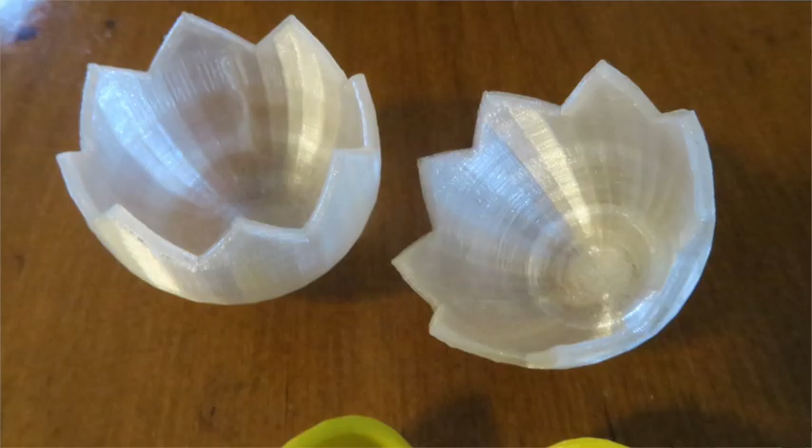Okay, so in this series of tutorials we will use Tinkercad to make a toy consisting of several layered eggs with a puzzle in the center. And the outermost egg will be a shell that can be opened along a sort of zigzaggy cut.

So we're going to start by bringing in an egg shape. We'll find it here under characters. So let's bring the egg in here and switch to top view, and we're also going to use orthographic view. The first thing we're going to do with this egg is we will resize it. Now if I resize the egg and I hold the shift key at the same time, then it's going to keep the aspect ratio of the egg, so it's going to stay round.

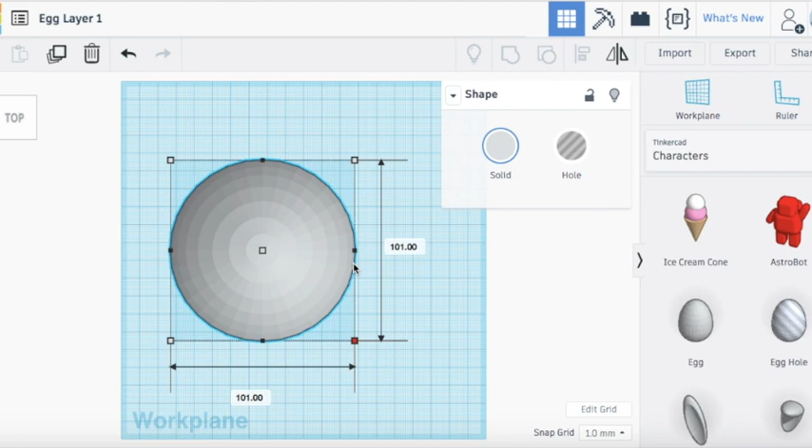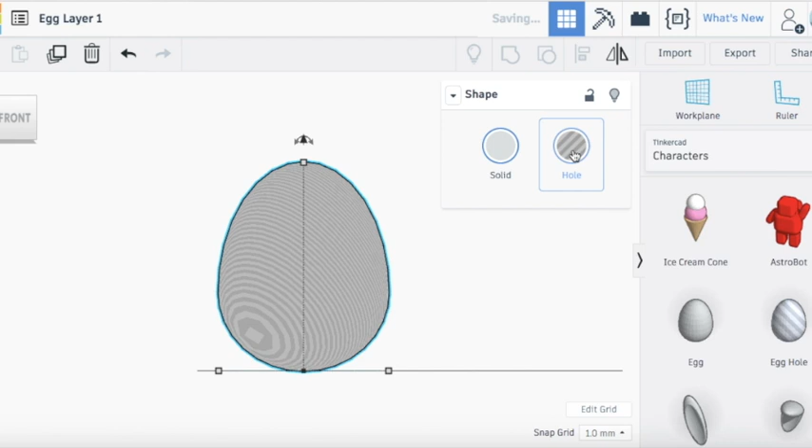We're going to resize this to 80 by 80 millimeters. Now let's also adjust the height of the egg. Right now we have 106.9. Let's make that around 100 millimeters for the height of the egg. So this egg is solid. If I were to cut it open, you would see that it's solid inside. I will change the material temporarily to hole so that we can see inside the egg.

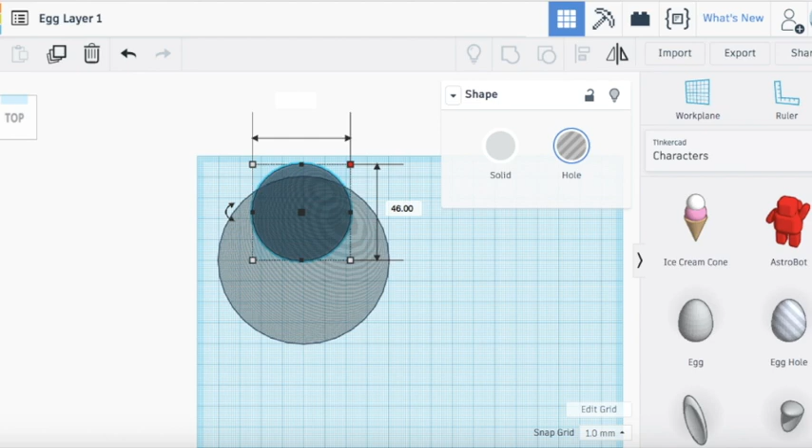Now I'll bring a second egg to make a hole in the center. So in the end we will subtract the hole from the egg and I will just be left with the shell. So let's make the width of the shell 4 millimeters on each side. The width of the outer egg is 80 millimeters and we have to subtract 4 and then another 4 because it's 4 millimeters on one side and 4 on the other. So we will end up with 72 millimeters for the width and the depth of the hole inside the egg.

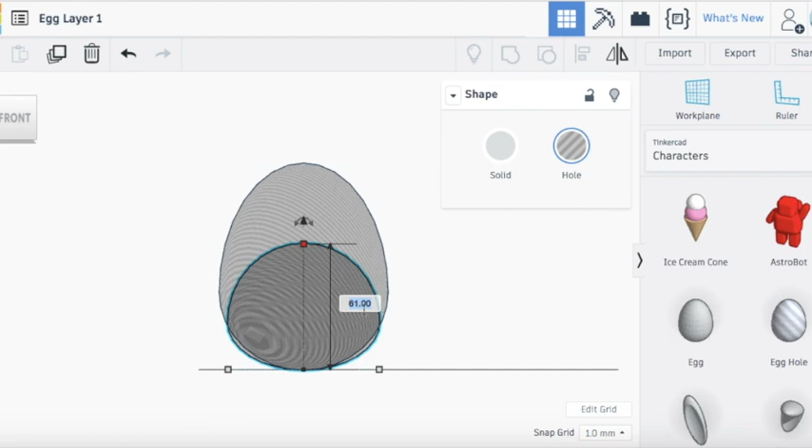Let's also center these. I'm going to center it here on this point, which is at the intersection of these axes. And for the height, let's switch to front view. We're going to make the height also 8 millimeters less. So 8 millimeters less than 100 millimeters will be 92 millimeters. And then I'll bring it up 4 millimeters. So it will be exactly centered in every dimension inside the other egg. So now I have a 4 millimeter shell all around the egg here.

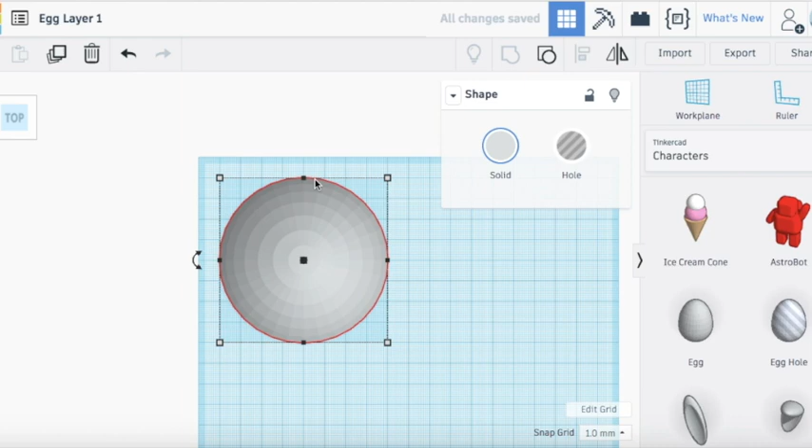So now we select the outer egg, change it back from hole to solid, and then I'll select both. By selecting a rectangle, I can select more than one shape. So I've selected the egg and the hole, two shapes it shows here, and now I'm going to group them, and now we actually have the shell of an egg. We can't see inside this egg now, but I will temporarily switch it to hole so that we can see that it's actually just a hollow shell.

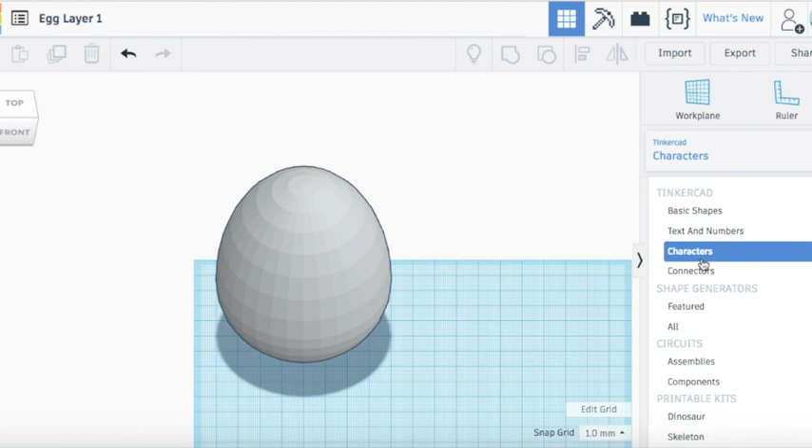So the next thing we will do here is we'll have to cut out a zigzaggy shape so that there'll be a top and a bottom half of this egg. In order to cut out the shape, we will make a stencil. I will demonstrate how we can use a stencil to cut out the shape any way that we want and also to make the top and the bottom fit together. So we'll start with a cube. And I think I'll also align this cube with the coordinate axes here. So I'll make sure that it's exactly at one of these intersections of the big axes.

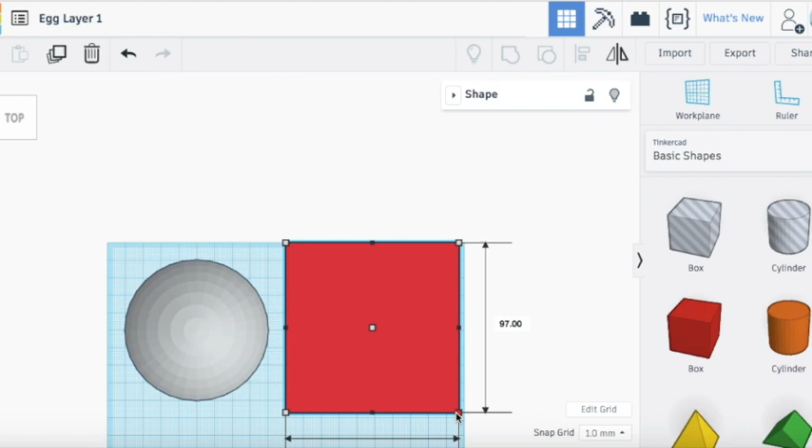Now I will make this cube a little bit bigger than the egg itself. Again, when I resize the cube from one corner, I can press the shift key, and this ensures that the cube will retain its shape so that all the sides will be scaling in the same way. And I will just scale this cube to 100 by 100 by 100. So this is the cube. Now in front view, I'm going to bring it down. My egg is 100 millimeters high, so I'll bring this down 60 millimeters. That will more or less put the cut roughly in this area.

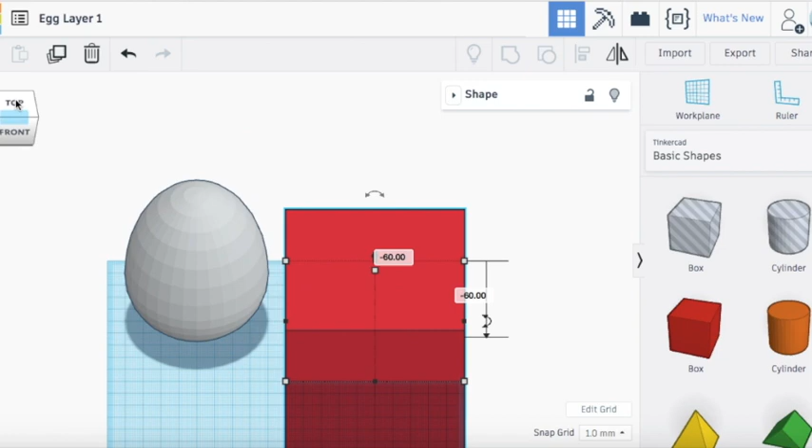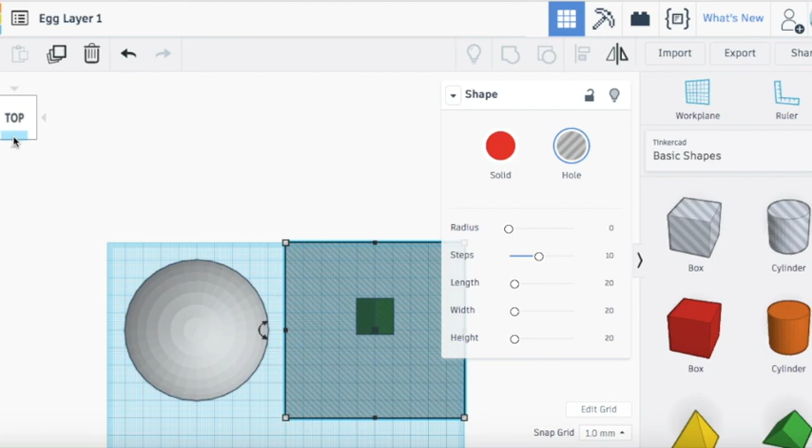Okay, so now we'll bring in a little triangle shape here, and I'll temporarily switch my cube to transparent so we can actually see what's behind it. Now this little triangle, the first thing I'm going to do to it is I'll bring it to the top. Now when you have a shape inside another shape, it can be a bit difficult to select because when I click on the triangle, I always end up selecting the cube. So one way around that is to select them both. So I can click and drag to select them both, the triangle and the cube.

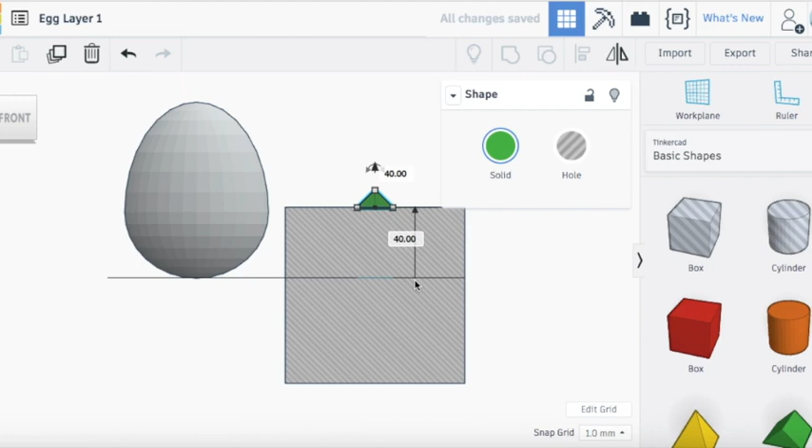And then I can shift select the cube, which will actually unselect the cube. So that's a way of selecting the inner shape here. And I'll just bring the triangle up to where it's exactly stuck to the top of this cube here. So that's a height of 40 millimeters right now from my work plane to where the top of the cube is. So let's zoom in to make sure it's exact. I don't want any gap between the triangle and the cube.

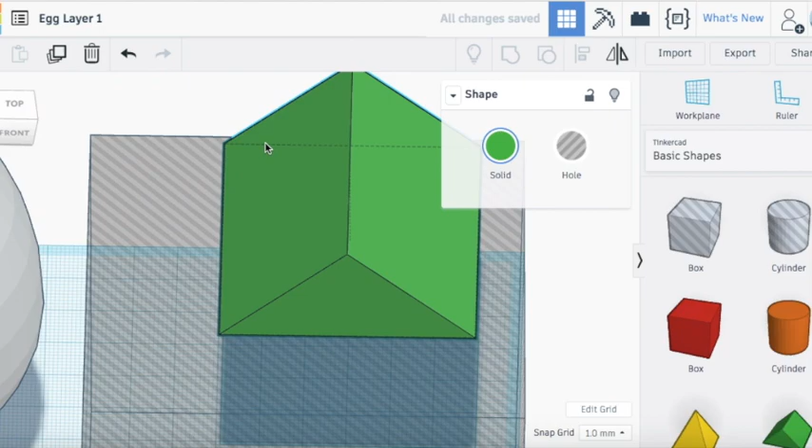And now we're going to take this little triangle and we will make it much bigger. So again, I'm going to hold shift, and from 20 by 20, we're going to rescale it to 60 by 60. And because I held the shift key while I was rescaling it, the triangle actually kept its original shape. So it also got higher in addition to getting wider.

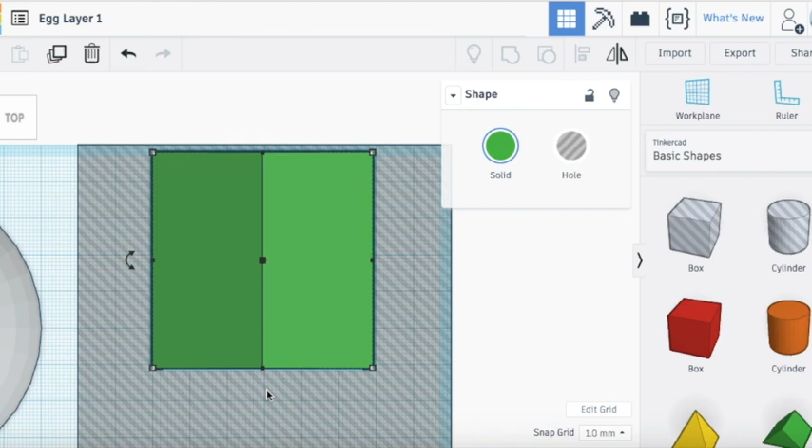So now the next thing I have to do is center the triangle with respect to the cube. So fortunately my cube is lined up on these large grid lines here, and it's exactly 100 millimeters wide. So I'm going to center the triangle so that the center of the triangle piece lines up with this line here in the center of the cube. I always want the width to be in even numbers so that the center will also be on one of these grid lines here. Okay, and I'll bring the cube up a little bit.

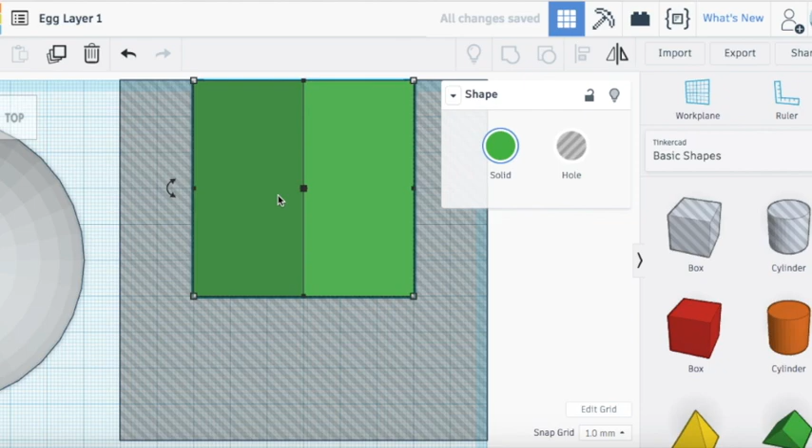And here's another trick. When you click and you drag an element around, when you press Shift, it's going to restrict it to either a vertical drag or a horizontal. So if you press the Shift key while you drag an element around, it's a good way to adjust only one coordinate, and it can't go sideways when you don't want it to. So now this triangle is in the position that I want it. So this is what I have right now, a triangle attached to the top of a cube.

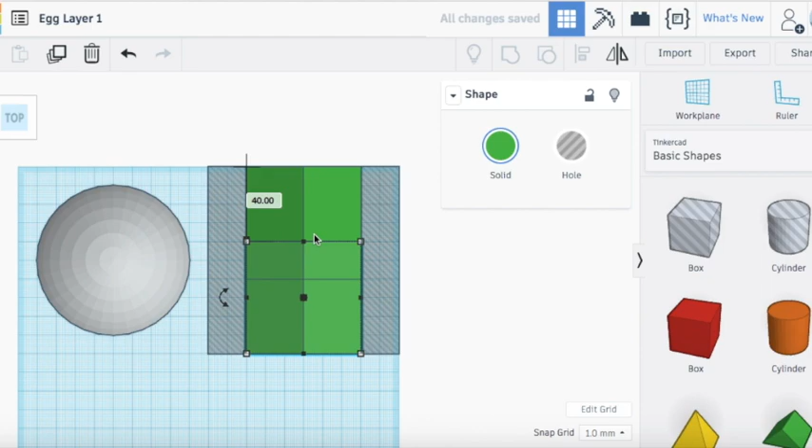Now I'll select this triangle and I'll duplicate it, and then I'll press Shift again, and I'll move the duplicate straight down by 40 millimeters. So I have two triangles attached to my cube now. Okay, so it looks like the roof on a house. Now I'll select both triangles, this one and this one.

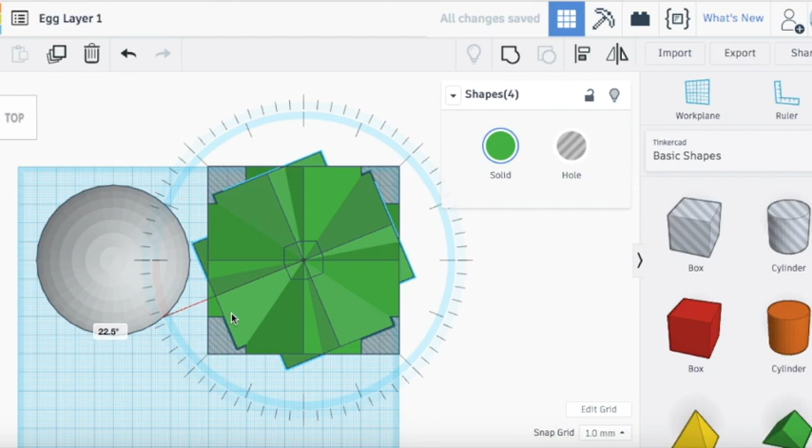I duplicate again, and I rotate the duplicated triangles by 90 degrees. Then I'll select all four of these triangle pieces, and I duplicate, and then I'll rotate by 45 degrees. So that's a very quick way of getting 8 triangles arranged on top of the cube here in a star-shaped pattern, and it's all very symmetric because I was careful to center all the triangles before I rotated them.

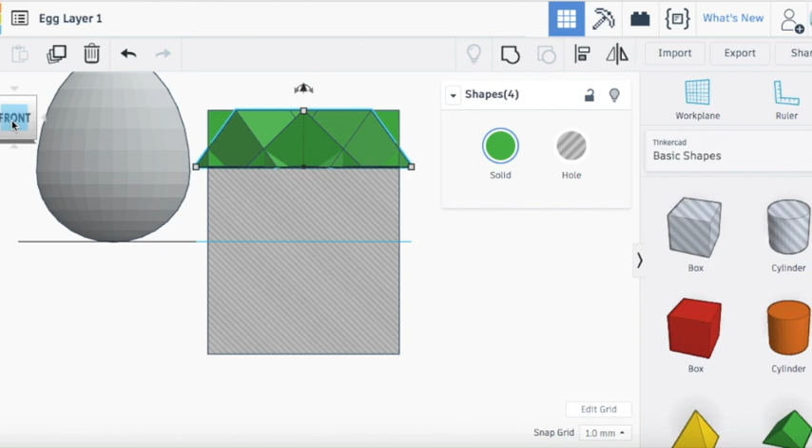We will use this later to cut a zigzag pattern into the eggshell, and I don't want that to be completely regular. I want it to be so when I turn the top piece of the egg, there should be only one position where it will fit. So for that reason, I will take each of these triangle pieces and move it up or down. Well, actually not up. I'm going to move them down by random amounts.

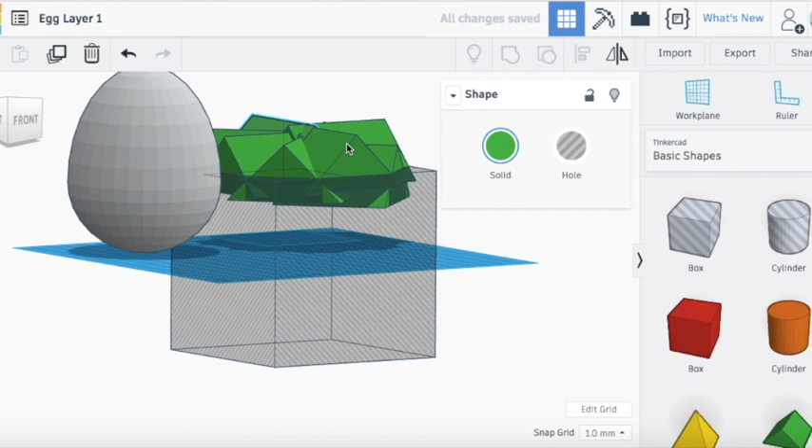I'll not pay too much attention to how far I have to move them. I'll just move them by a random amount. I'll take the diagonal ones and make them a little bit further down than the rest of them. Let's see how this looks. So they're not terribly different, but some of them are just slightly more up or down than the others.

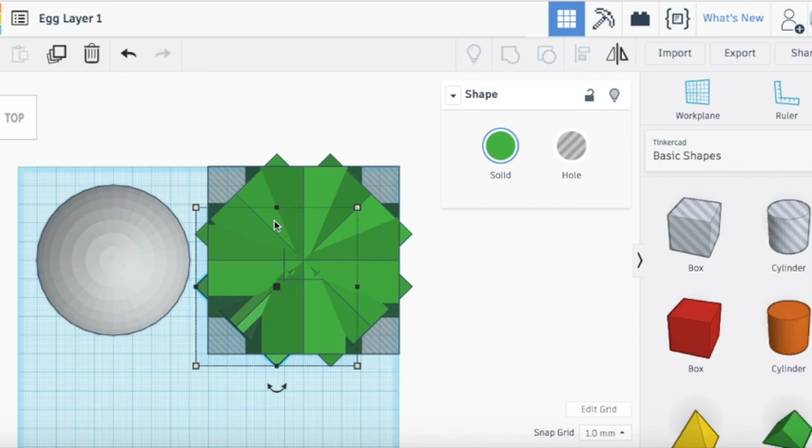And I'm going to switch to top view because the egg layer will go here. So I have to make sure there are no flat parts in between these triangle pieces. For example, if I brought this triangle piece down too much, then you would see in the top view that there's actually a part of the top of the cube that is exposed here. So that would not work later when I want to intersect my egg with the stencil. So let me bring this up so that I don't have that. So now it looks green, green, green everywhere where the egg is going to go.

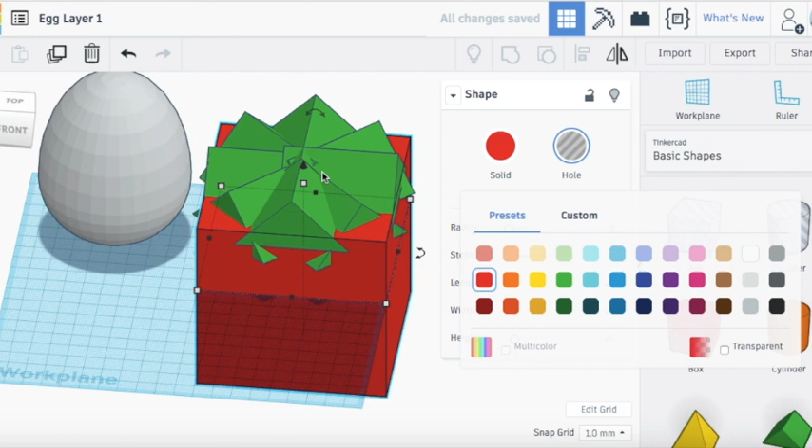So this assembly here, consisting of the cube, which I will make solid again, and these triangles attached to the top, that is going to be part of my stencil. Now before I do anything with that, let me just make a copy of the cube because I will need this copy later. And for now, I'll just move it out of the way. I'm just going to use 100 millimeters here for the distance.

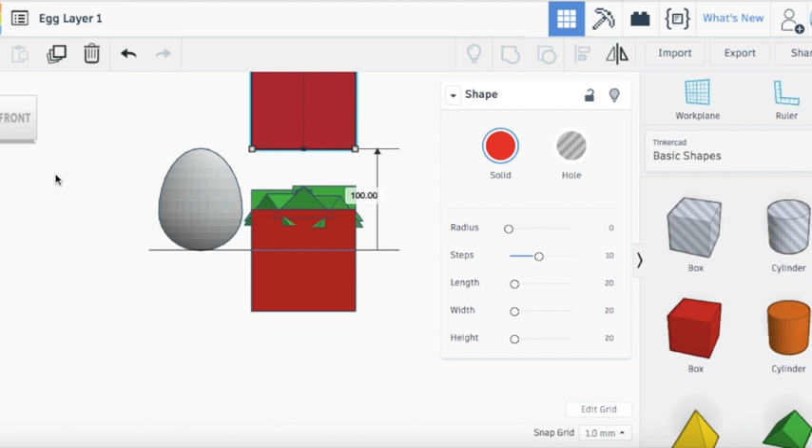And that will make it easier when I need to bring it back down later to bring it into a precise location. Now I'll select all of these bottom pieces. That's the bottom part of my stencil, and I group them. Okay, so now I have a single piece which has a sort of triangle-shaped roof. It doesn't really matter if some of the triangle parts are sticking out on the sides of this cube here. That is just fine.

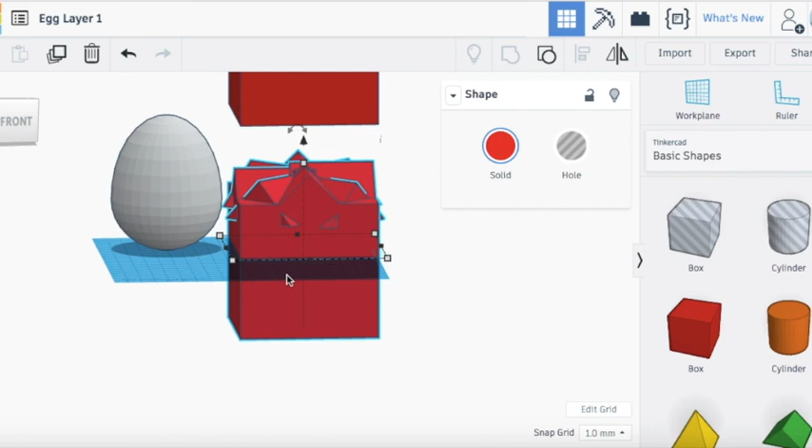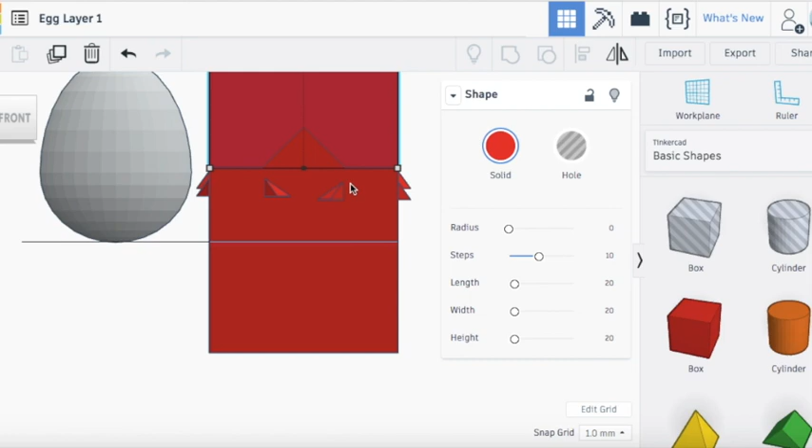The next thing I will do is I'll bring the other part of the cube that we stashed away here back down. And I'll bring it back down to exactly where the top of this cube was. So that should actually be 40 millimeters above the work plane. So now the bottom of this red cube fits exactly the top of this red cube. They're both exactly 40 millimeters from the work plane.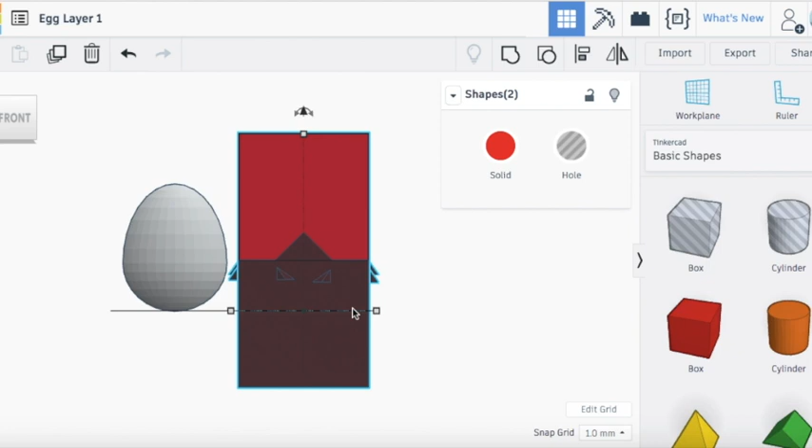So now I'll select the bottom piece. This is the actual stencil for the bottom part of the egg. I will duplicate this, and then I'll take the duplicated piece and turn it into a hole. Then I'll shift click the top cube, which is still cube shaped. So now I've selected the top cube and the hole for the bottom. If I merge these two pieces, now I have a top piece which is exactly the complement of the bottom piece here.

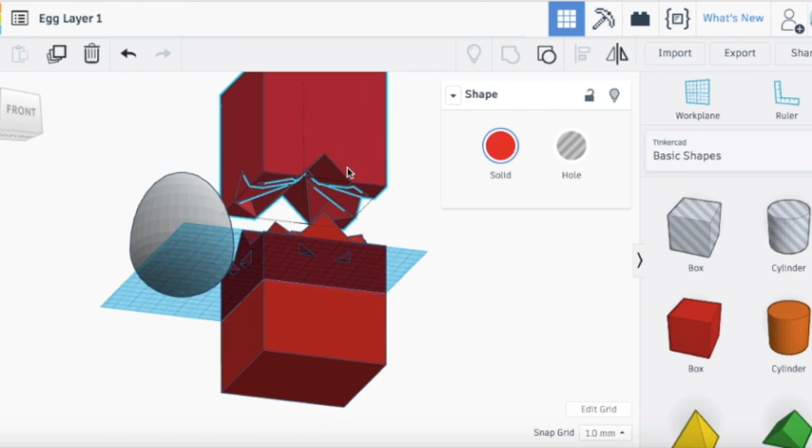So if I temporarily move this up and we go into the three-dimensional view, we can see that the bottom of the top stencil now has some material cut away from it. So it's exactly the opposite of the bottom stencil. So I'll go ahead and press Command Z to move the pieces back together so that they fit snugly.

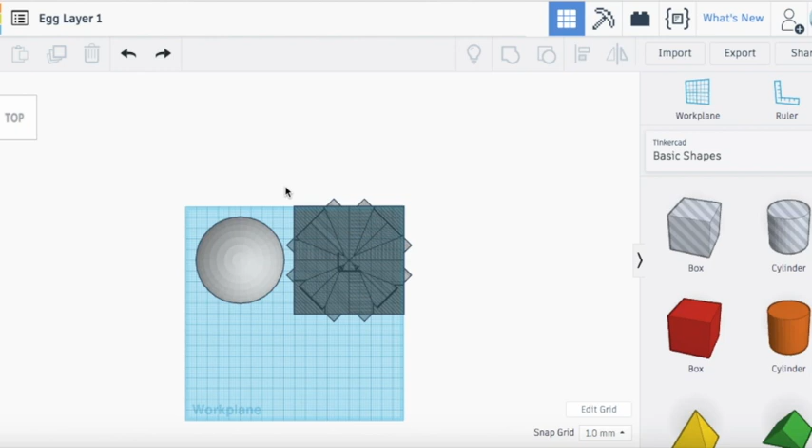So now I will take both of these stencils and I'll turn them both into holes. So we're going to use these to cut the top and bottom pieces from this egg here. So let me switch back to top view. I'll select both of these stencil pieces, and first of all I'm going to duplicate them because I usually like to keep my stencils for later reference.

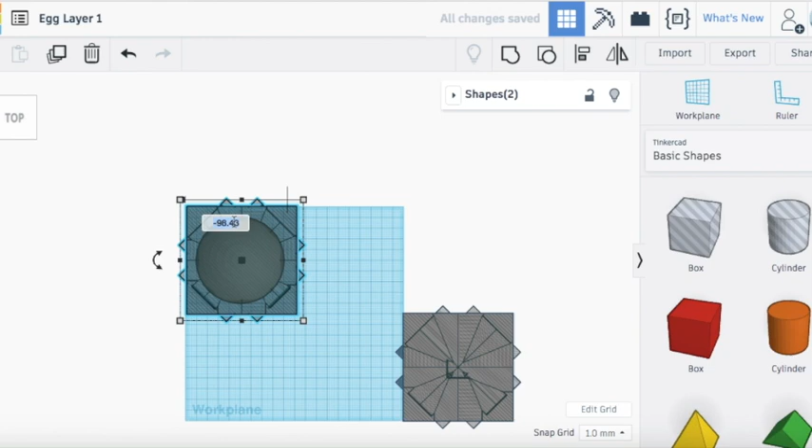I'll just move them out of the way somewhere, and I like to keep track of their location, so I'll move them exactly 100 millimeters over and 100 millimeters down from where they were. And now I'll select both of these pieces and I'll move them over the egg. So they should go exactly 100 millimeters to the left, not 98.43 or anything like that. This way I ensure that my egg and my stencil are exactly centered with respect to each other.

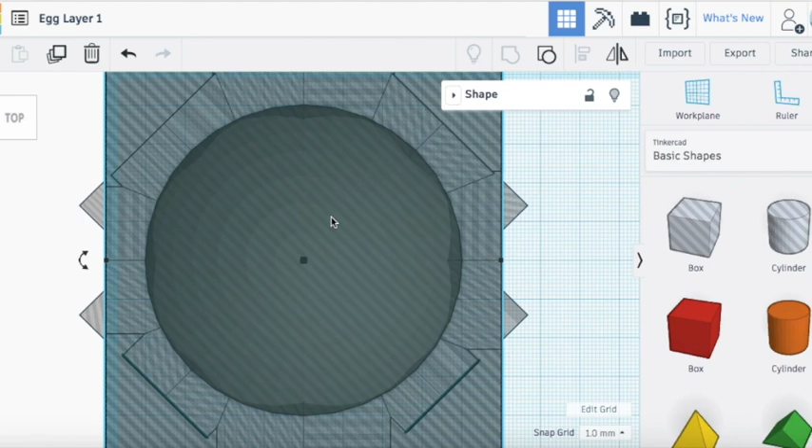So the reason I got numbers like 98.43 here was because of these corners. By default, what Tinkercad would like to do is align these corner points on the millimeter grid. So instead, I typed in the -100 to make sure that the whole stencil would end up in exactly this spot where it now is.

So now I'll use these two stencils, the top one and the bottom one, to cut the egg into two halves. The first thing I have to do is select the egg. Now, because the egg is behind the stencils, I can't select it from the outside. So a good way to do it again is to select all three pieces, the egg and the two stencils, and then just shift click on the stencils to unselect them. So now I only have one shape selected and it's actually the egg in the middle.

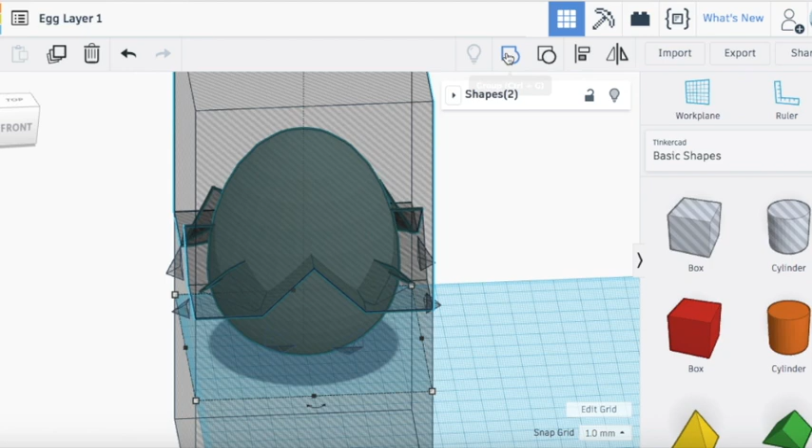Now I will duplicate the egg because one part will become the top and one part will become the bottom. So now one of these duplicates is selected and I will shift click the top stencil to also select it. And now simply, because the stencil is a hole, if I group now, this is going to remove the top part of the egg and it will keep the bottom part. So it takes a moment to compute this here. Now the top part of one of the egg copies has been removed.

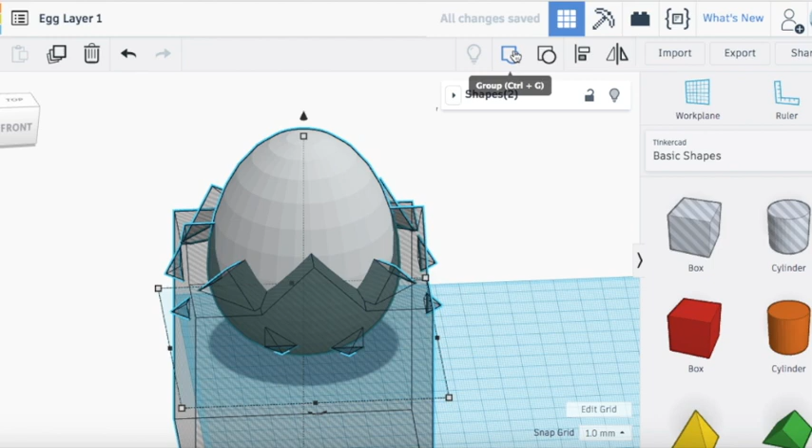Now I'll select the other egg copy and the bottom stencil. And again I'll group. This will remove the bottom stencil from the egg. So I'll only be left with the top part of this copy of the egg. This again takes a moment to compute because it's quite a complicated shape. But when it's finished, you'll see that the egg now has a zigzaggy cut in it. And that finishes the first part of the project.

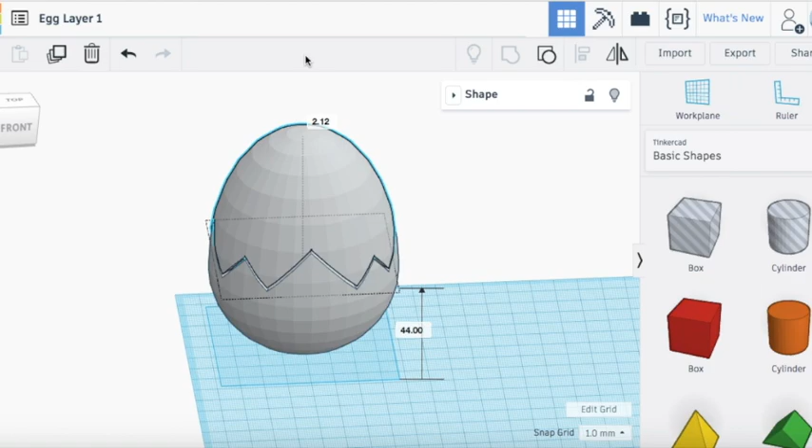Come back for the next part to see how we're going to make an eggshell with a hinge in it.